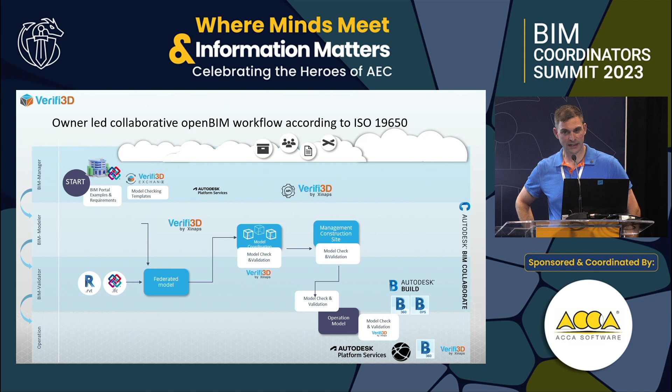And we've got this situation - this was actually meant to attract investors, but you see it's quite complicated. What's to take from it? There's a lot of exchanges going on between different parties. Everything is trickling down. There are steps where, from different sides, model checking against whatever requirements is necessary, and we also see points where people would expect IFC or an open BIM request, or a standard imposed by the government or by exchange with other parties, but mostly people would be working on the proprietary platform.

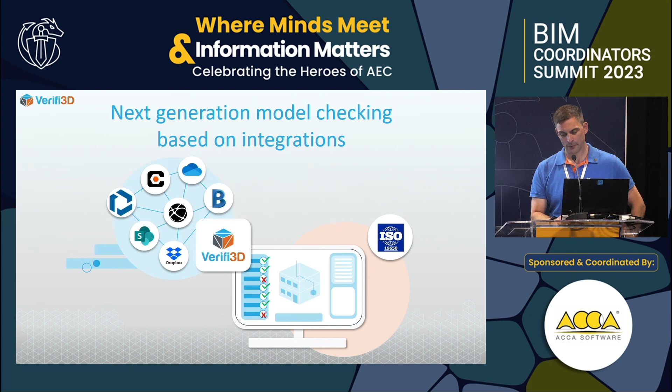Which takes us to Verifi3D. We believe in connected BIM - connect to different CDEs, connect to different platforms, be able to read different file types, open and closed, and then forward your findings to other parts. There's different types of models we can read in, open and closed - Revit, IFC, and by now also with the upcoming release next week, 3D DWG. You can share models on a CDE, different ones, and we are just adding to those.

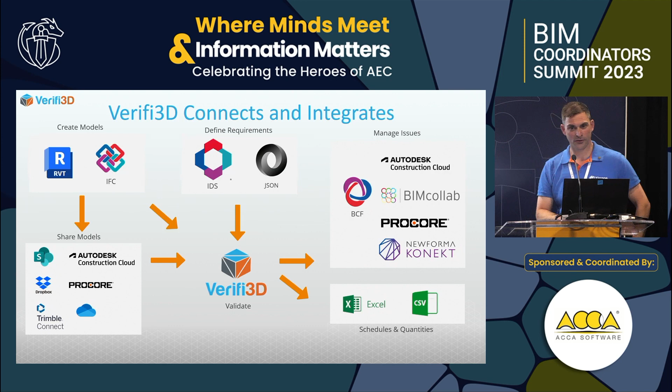I just made an initiative for a Hive, like an open distributed CDE. Different issue trackers, some present here like Newforma Konekt, BIM Collab, and your schedules and quantities you can export. The thing on top is really important, which is what we often don't see in BIM management - the file format for requirements, which in our case may just be JSON, but also there's IDS, which you've seen in presentations before - the Building Smart standard for requirements, or at least for requirements about level of information.

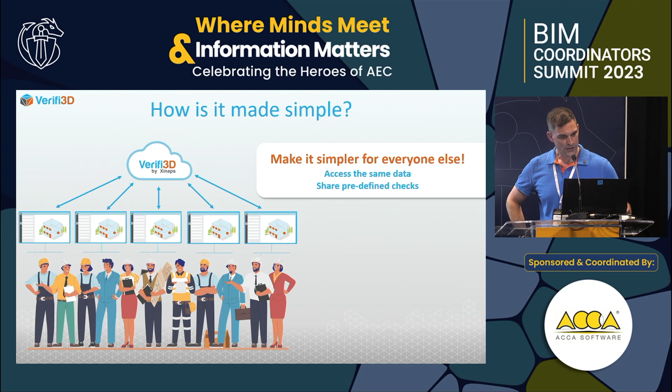Which concludes the PowerPoint part, so now I'm going to open Google Chrome, if I can find it here.

Okay, here we go. At least it's faster than starting up Revit.

Including everything, I could log on here with OpenID on Microsoft and Autodesk, and probably will add Facebook and Instagram in the future for making yourself known. I'll use my verified login here with my company address. So if you want to send me a mail later on, you could use this mail.

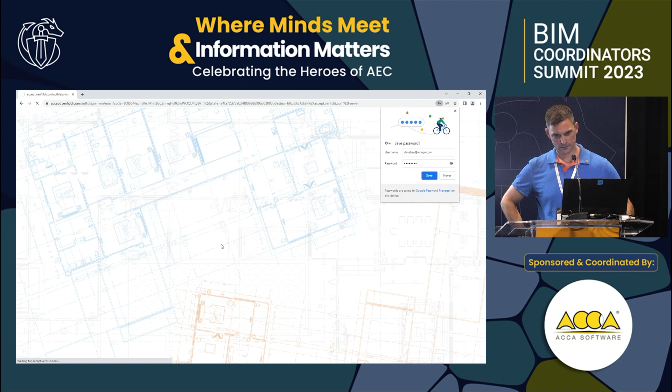And we're in. So basically, this is the landing page, and we can go to our own project. It's a cloud service, so people work together in companies with different roles. Currently I'm a company admin in my own company, or kind of account, as it would be called in Autodesk lingo. You've got settings and so on, like all these things you know from a cloud application. From here, I directly go to the project.

You can see we connect to multiple CDEs. I'll open something from SharePoint, but you see Autodesk, Dropbox, Google Drive, and so on, and more to come. So I go into one of these projects I've prepared just for this presentation, and going into the models, you see in the top left the CDE data as it is on SharePoint. So I can open a model directly from SharePoint, in this case a Revit model, because maybe that is what we just created.

Currently it's loading that from the cloud into the local machine here, so it depends on network connection. Actually, we are running the checks in the cloud, but the models are visualized in the browser, and we can load multiple gigabytes of Revit or IFC models, or combinations of that, into the web browser. So it really depends on the network connection how fast it is. The checks mostly run in the cloud, so you won't have to wait for that.

Here we go, here we go. So, and here we got the model. People probably know this one. Actually, it's a variant of this hospital, it's the COBie standard model I got here.

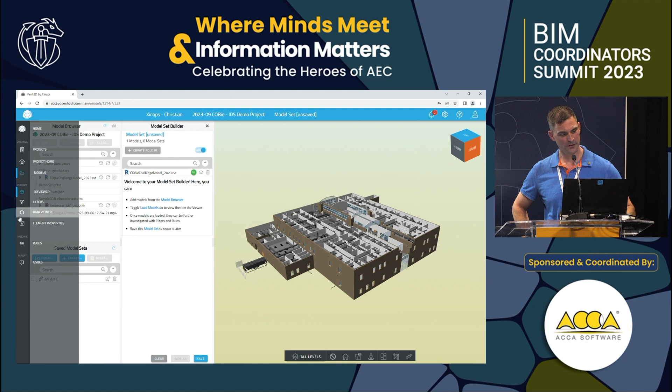So we've got a 3D viewer on top, and on the bottom we've got the data viewer, which, to understand the concept in a way, is like the 3D viewer. You can navigate these 3D objects, and in the data viewer you can navigate data space and see it from different perspectives.

So I've got different presets here. This is just like a name and some kind of ID. We can add columns here using this tool. It already knows which kind of properties are present in all the elements here, so we could pick specific ones. So maybe if we want to know something from a data property set, we can select from properties which are present, and we have the columns here.

You can save these presets. So I made one for IFC, it's quite empty because we've got a Revit file. I got one for Revit. Currently we've got one Revit file here, so we see more.

And what you can do with this is, right now we're looking at the data flat, but then you can group it, for example, by category, just to see what's going on here. So we can, for example, color this by category, or we can do it similarly by level, so basically this is a way to get different perspectives on the data.

I just want to wait for the colors because they're really pretty. Here we go. So this would be the whole model by category, or we could do the same thing by, let's say, level. We can also drag around. So maybe you know these kind of interfaces.

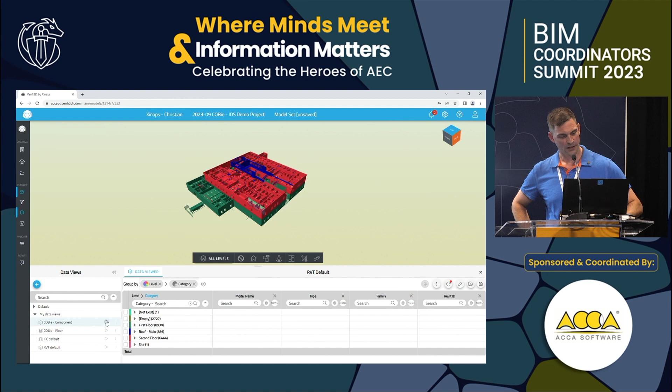We think this combination is really powerful, especially because you can also directly create filters from these things you find, and add columns from any property in the model. With that, you can create data views, for example, ones consistent with the COBie table for components, because COBie has many tables.

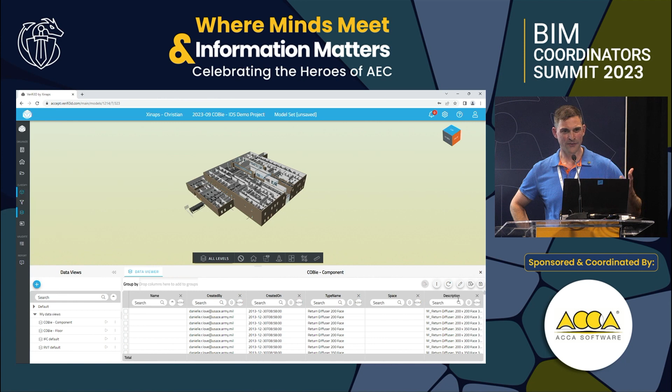Which also have many columns, so I just had a couple here. I added more, but actually what I noticed is that Autodesk doesn't fully support it, because for identifying from which software this model comes, it would always write Autodesk on the export to Excel, but in the Revit file itself it doesn't tell that. But you see, from looking at these properties, that a lot of things are not filled in, which brings us to our actual requirements.

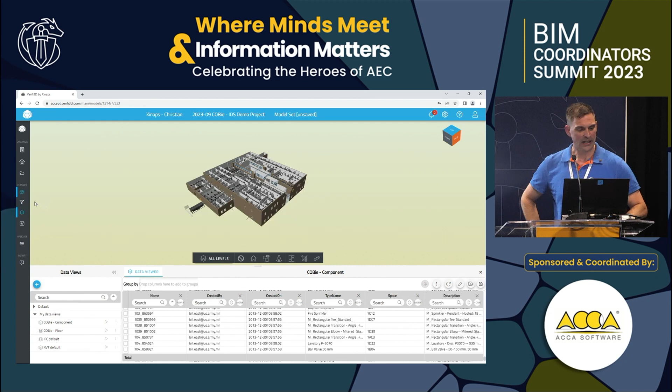So we've got this requirement on this project that everything should be specified according to COBie, and we have received these requirements for a certain level of information in IDS format. So what we can do is go to the rules part, and import an IDS file.

Which is the part I didn't think about, because I would need to get a USB stick for that. If you agree, may I use this? Okay.

So let's import my IDS file. Actually, we want to support also getting this IDS file directly from the CDE. We haven't implemented that yet, but I can import it. So it's coming from this open standard of buildingSMART for requirements.

Currently it's processing it, and then it will appear here, unless I misclicked. Yeah, I think maybe I did something wrong. Let me try that again. Open. Yeah, here it is. Actually, it was there twice even. Now I got it twice. Never mind.

So it contains all the checks I've got there. I started basically making a couple of checks which cover everything COBie. So for the COBie component, I made checks for all these columns I got here.

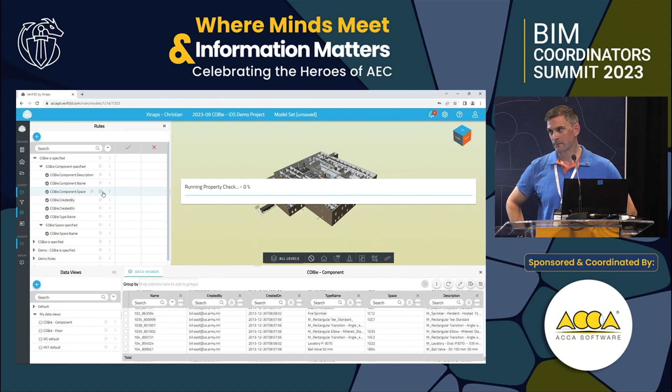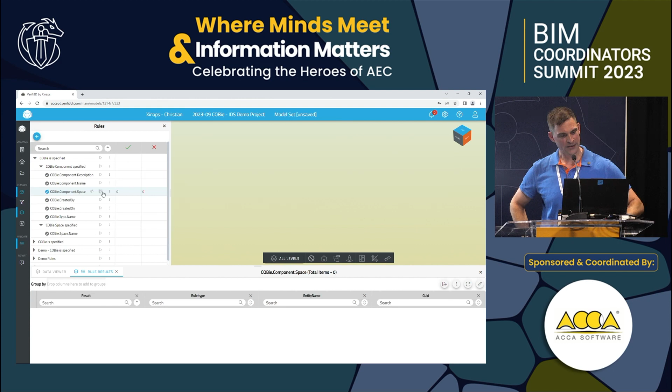And I can run it. It will look for all the objects which have space, COBie component space defined, but it will look for the things defined according to IFC, because it's coming from an open standard. So looking at the rule, it's looking for COBie component space exists, but the filter which looks for it is looking only for IFC entities.

So I could extend this, looking for category. Basically it's equals star, so it's a wildcard, equals everything I can do. Equals star for category as well. So basically I extended the filter to also see all the Revit components.

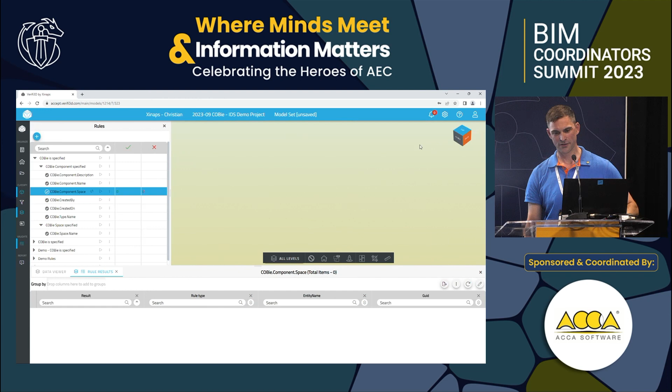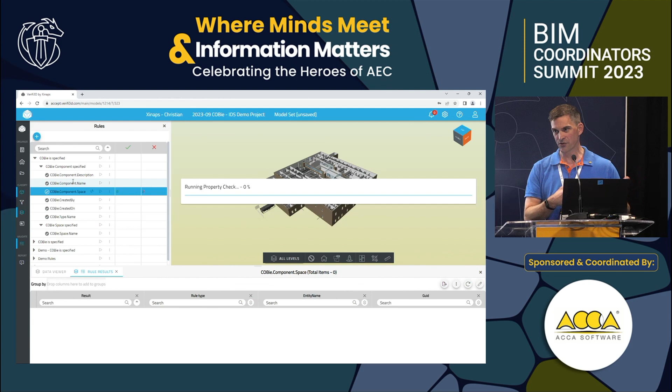So now I've got this check which is working across Revit and IFC files, and if I rerun it, it's looking for this part. Actually, this filter is used by all the components, by the whole component folder, because it's understood according to the logic of which objects these rules apply to.

So now I can run this rule. It takes a bit, it's doing it on everything, and now we get the results. They're going to appear in the table. We also see a display showing which ones have got the space defined and which ones don't.

And this rule I've now created, I can share. So if I'm a project manager, I can share it with everybody in the project, or with everybody in a different project, and they can check both the IFC and Revit files. So I've actually made it simpler for everybody else. They can check at any point in time with whatever model they have, the latest model and so on.

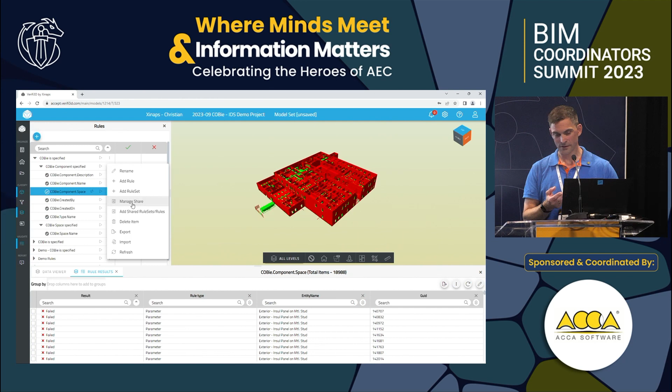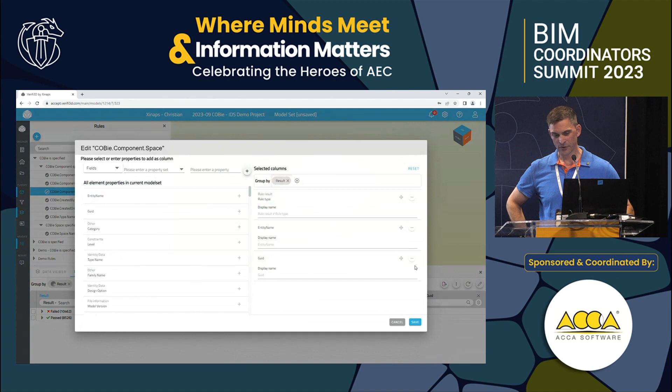They can check this. So you see here, we can again use a grouping. For example, we want to see the results, maybe we want to blame people, so we look up work sets. We maybe don't have it in the IFC file, but we do have it in Revit. So if people worked in Revit with work sets, we can look at which objects failed on Revit, and then we also group by GUID. Because we have multiple checks here, okay.

I'll wait for Verifi3D to catch up with me. Yeah, it wants to build that view first.

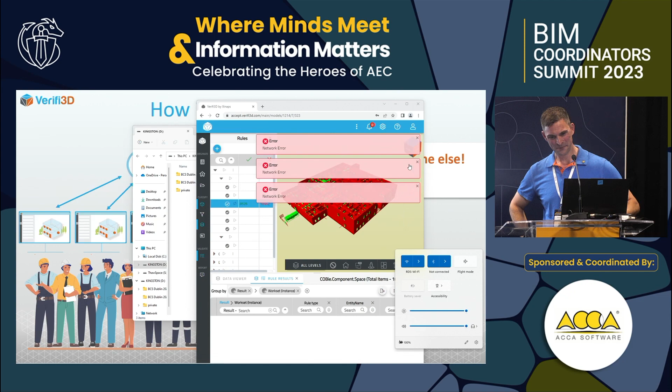So I got a network error. Stage 6 is a bit cursed, isn't it? Let me see, I could just try that again. So I got this refresh button, maybe that will fix it. No. Good, I'll just load that back in and we'll have another go at it. It seems it's a bit broken right now with the network connection.

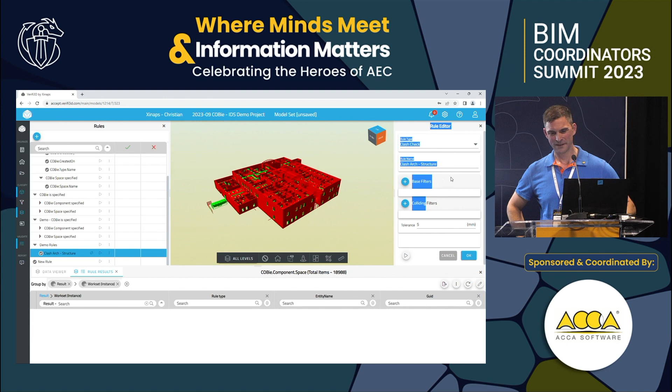I've also prepared other rules, for example for clashes. So I created clashes which were made in just the same way. Wait a second. Yeah. Okay, it seems the network connection is broken.

So that concludes the demo. Going back to the PowerPoint, which I think is over here. Yes, it is.

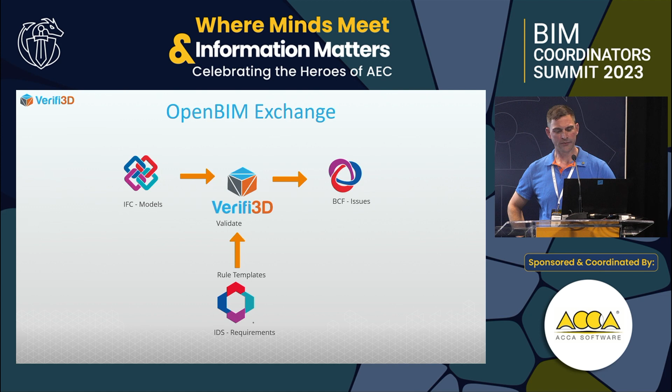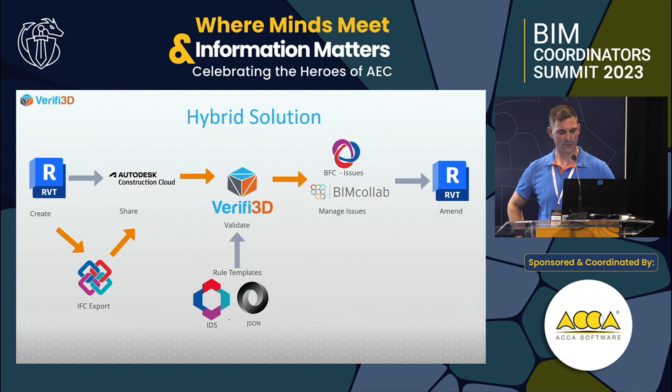Basically, I just demonstrated this step from the Open BIM workflow, the Autodesk workflow, and the way of finding a hybrid solution using connections across different platforms, making it simpler for everyone else and the BIM managers themselves, because they are no longer the bottleneck. That concludes it.